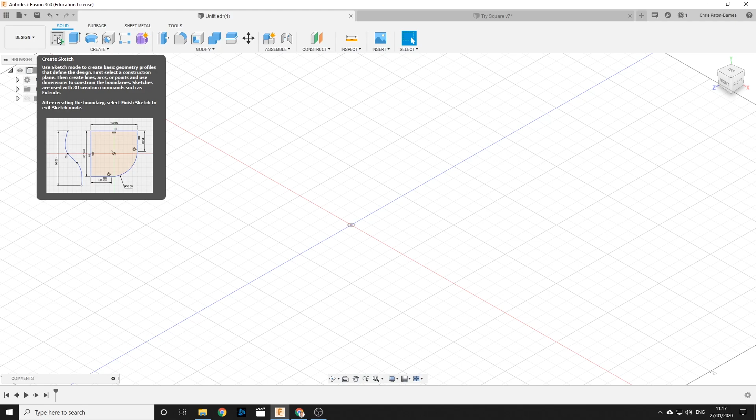So if I switch to a new document, I get my work area. Everything in Fusion 360, in solid modeling anyway, starts off with a sketch. So I can click this Create Sketch button, and it's going to ask me to select a plane. For this, we're going to choose the front plane. It's going to twist that front plane to make it face me.

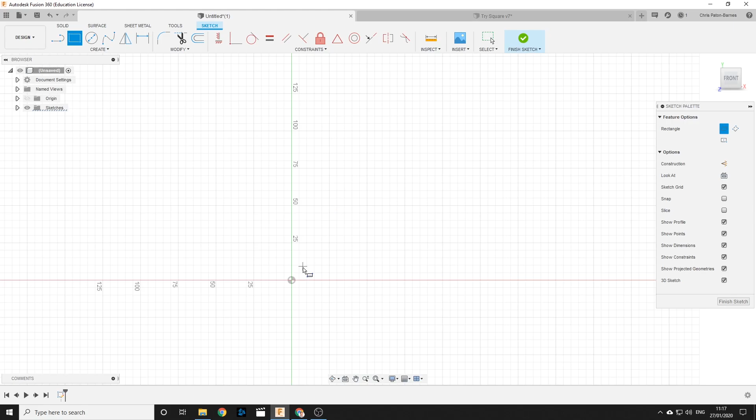We're going to start out by drawing a rectangle, a 2-point rectangle in this case. So we can start by hitting the shortcut for that, which is R. You see my cursor changes to a rectangle. Start that at the origin. Define the other corner by clicking again.

The first thing you draw in all of your kind of projects or designs should always start at the origin in some way. It should be tied to the origin, and that's generally best practice.

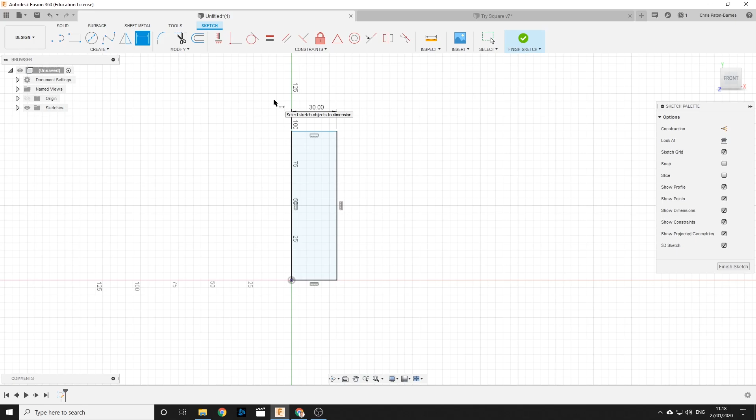We need to give this thing some sizes, so I'm going to hit D and see my cursor change to a dimension tool. I'm going to click on a line to define the length of it. Move my mouse, click again, and I'm going to type in 30. I'm going to do the same for the vertical line, one of the vertical lines, and I'm going to call this 125.

The default units that I'm using are millimeters. You don't need to type in your units if the measurement you want to define is already in your default unit, so I just need to type 125. I press enter, and then, if I'm happy with this, I can press finish sketch.

The finish sketch button only appears when you are currently editing a sketch. So if you're confused about why you can't edit something or can't change something, it's probably because you're not editing the sketch.

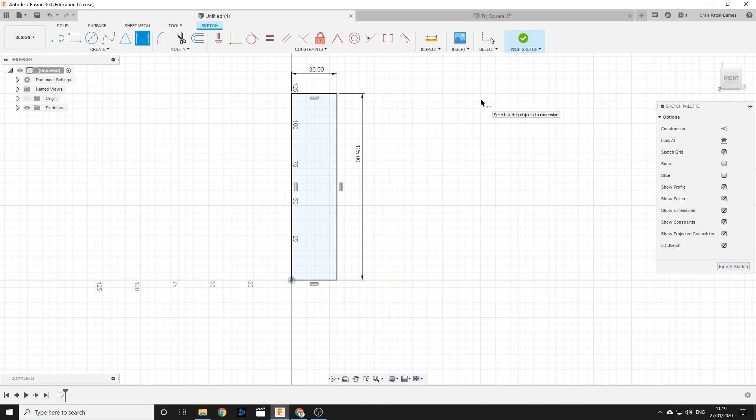Press finish sketch. Let's see if we can look at this in more of a 3D view. So we can come over to the view cube over here and press home. Now you can see we're kind of in a 3D view. If you're on a laptop, you can use the trackpad and pinch to zoom in and out. If you're on a mouse, you can just use the scroll wheel.

We need to make this 3D. The part we are currently making is the stock here, the handle. So I'll switch back. To make this 3D, the tool we use is called the extrude tool. Extrude, shortcut for which is E. It can also be found in the Create menu here. You also might have it in your shortcuts up here.

Most of the tools that you use, a dialog box will come up. This is like selecting the options, filling in the boxes when you're checking something out online. You have to go to fill in your billing address, your delivery address. Some of these things are optional, some of the things are essential.

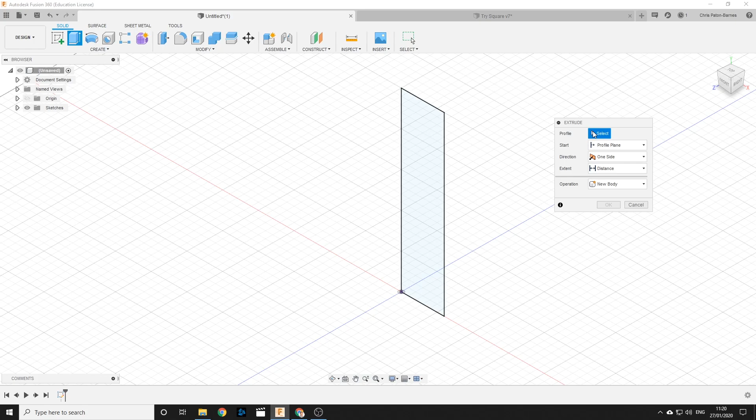A profile is what you want to be extruded, what you want to make 3D. So the blue outline indicates that we are currently on this option. So if I click on my profile, now it says 1 selected.

For the moment, for beginners, you don't need to worry about direction or extent. You just want to put in the distance. You can drag out the distance, but the problem with that is it will snap to your grid settings. So if you have grid snapping on, it will snap to your nearest grid setting. In this case, the amount we want to extrude by is 17 millimeters. So I'm going to type in 17, and then I'm going to press OK.

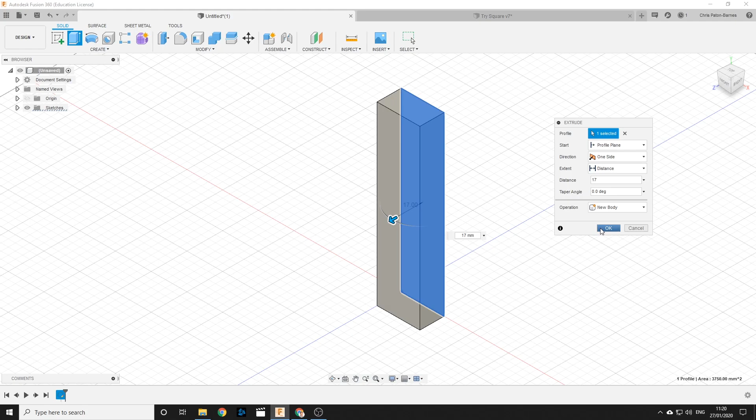Now, I was a little bit naughty because I gave you the wrong dimension for the original rectangle we drew. You can see that in our timeline, this area down here, your timeline contains icons referring to or corresponding to each step that you took in order.

So this is the icon for a sketch. You can see it corresponds, if I click on it, it highlights what that corresponds to. Okay, that little rectangle we drew. If I click on this rectangle, this extrude icon is here. You see it matches the same icon as the extrude. It highlights this body we've got.

If you want to change the size of this, you might be tempted to extrude again, extrude this way and make it a little bit bigger. You could do that, but it's incredibly bad practice. You should never do that. The reason is, if I click OK, I now have 3 steps in my timeline rather than 2.

So if I'm trying to find something in my timeline, and you keep on doing that, you'll have millions of things in your timeline rather than just a few. So rather than doing another mistake to correct an original mistake, I'm just going to delete that by clicking on it and pressing delete.

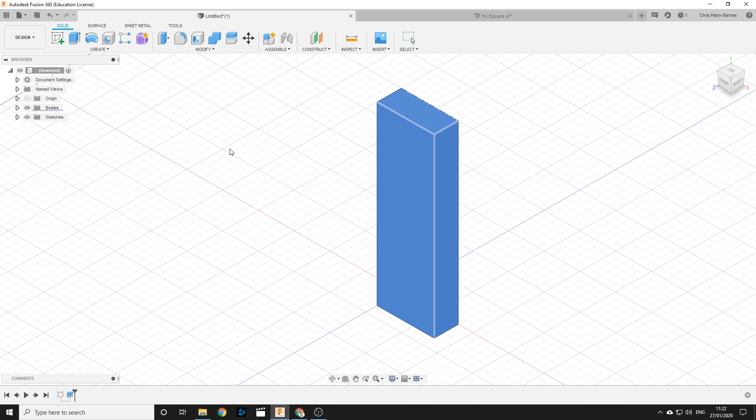And then it reverts back to how it was before. Rather than doing that, we're going to fix our original data.

I'm going to right click if you're on a mouse. If you're on a trackpad on Mac, you'd be option clicking or 2-fingered clicking to bring up the options menu. And then we're going to go up to where it says edit sketch. Click on edit sketch, and there it brings us back to where we entered our original dimensions.

These dimensions can be moved, they can also be changed. So for example, the one I gave you, which was 30, should actually be 38. If I double click this, I can now enter 38, the correct dimension. I'll press enter.

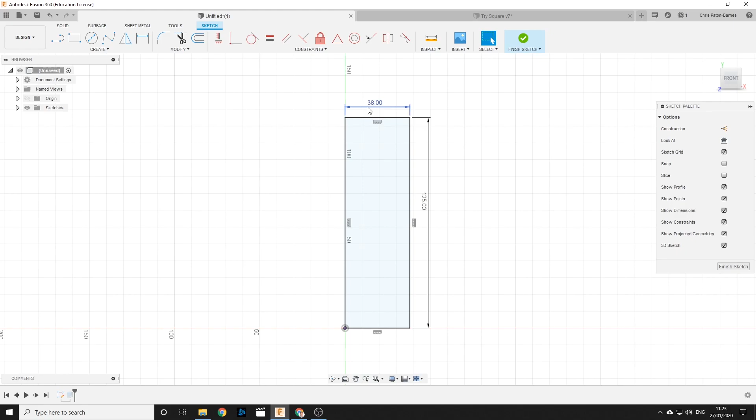The rectangle changes. When I press finish sketch, the shape will update. Do you notice my rectangle, my cuboid, is a different shape now?

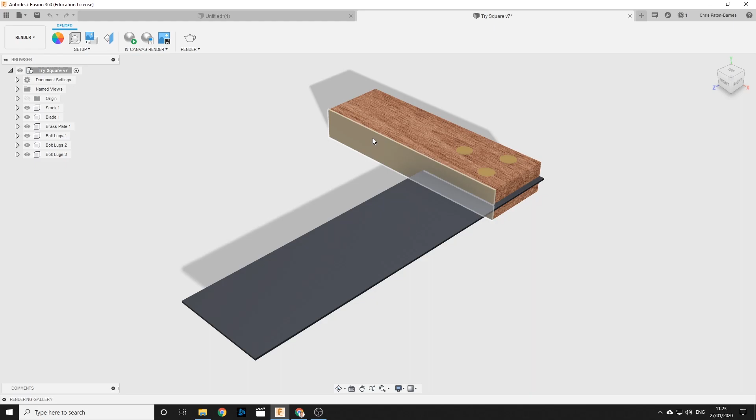The next part we're going to draw, if I switch back to our finished version, is this little brass plate on the front. So if I go back to our model, how do we do that?

Our brass plate is going to lie on this face here. And because that brass plate is exactly the same shape as the stock, our existing cuboid, we don't actually need to do a new sketch. We can use the existing face to extrude.

So all I need to do is press extrude, the shortcut for which is E. It's asking me for a profile. Now the profile I want to extrude is this shape here. I don't need to change anything here or here or here. The distance I want to extrude is 1 millimeter, so 1.

Here's where it gets a little bit different. I don't want to join. If I join those two bodies together, it'll just make one big blob. What I want is to show that there's a difference between those objects. So rather than join, I want to select new body.

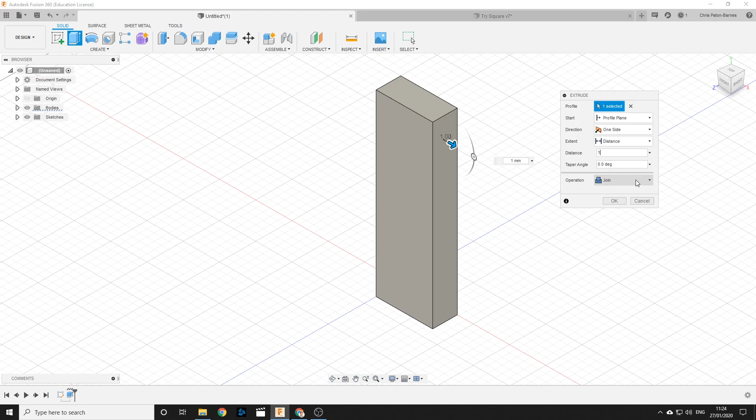If I zoom in, you'll be able to see the difference. Now there is a little separation between those bodies. If I click OK, you can see that there's 2 different cuboids there, which is great.

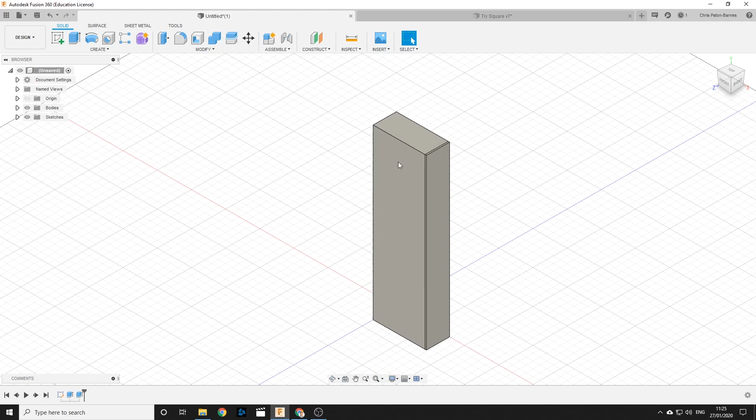So far you should have one sketch—please highlight that to show what it corresponds to—you should have an extrude, and you should have one more extrude, which is the tiny little brass plate on the front. Our next thing we're going to need to draw is the blade of the try square.

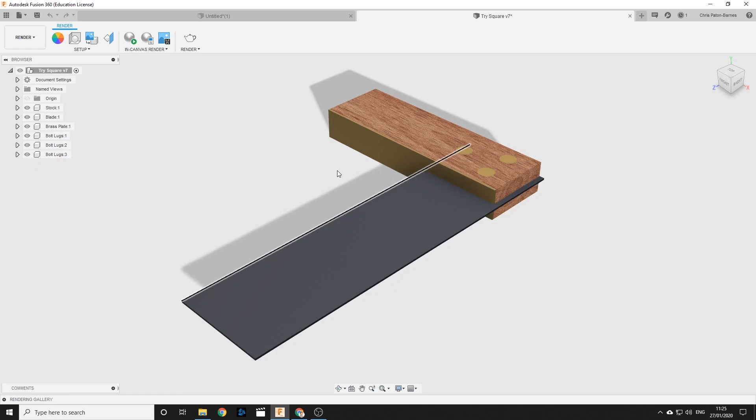You might be tempted to draw this big rectangle here and then extrude it downwards a little bit. But the problem, if you go back to our model, is that if I press create sketch, which face do I choose to draw this on?

If I draw it on this face, the blade will be on that face. If I choose this face, it will also be on that face, but actually it lies somewhere in the middle between those two. So we've got a bit of a problem.

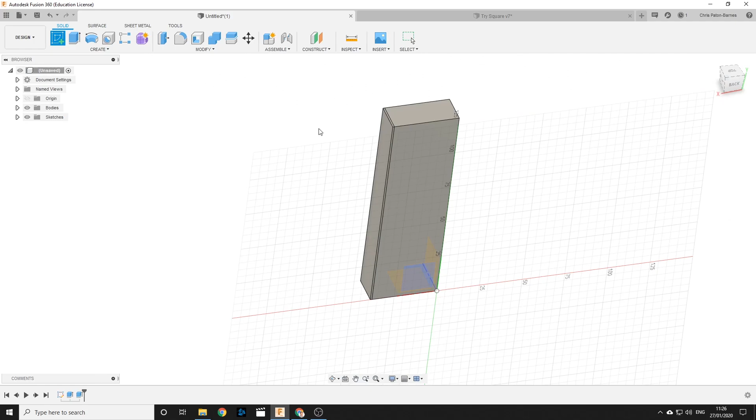In this case, instead of drawing the wide rectangle, we're actually going to draw on the back here—this tiny little rectangle—and extrude it this way, away from us.

So the way we're going to do that is we're going to switch back to our existing model. We're going to go create sketch. It's asking us to choose a face. Now, it's very important that you always choose the right face carefully to draw on.

Each sketch is tied to a 2D face, and if you choose the wrong face, you won't be able to draw the shape or in the orientation that you want to. The face that we're going to choose is the face around the back here.

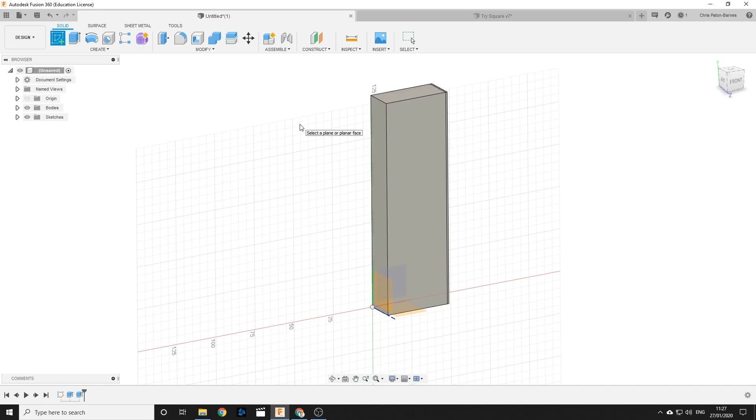So the way I'm orbiting like this is, if you're on a trackpad, you need to hold down Shift and just drag 2 fingers across the trackpad. If you're on a mouse and a keyboard, hold down the Shift key, hold down the middle mouse button, and then drag to rotate. The face we want to choose is this back face, so not the side with the brass plate, but the back face here. I select that, it's going to make it face us.

I'm going to zoom in a bit. And the first thing we're going to draw is a construction line. We want to draw a very small rectangle in the middle here, and to help us locate it in the middle of this shape, we're going to draw a construction line.

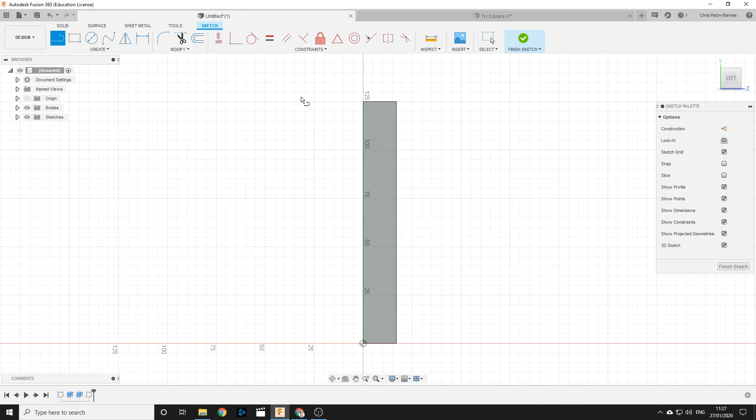A construction line starts with a regular line, the shortcut for which is L. If I hit L, you'll see my cursor changes to the preview of a line. You can also find the line tool in the sketch menu down here, or under the create menu.

And if I zoom in, the X that comes up is telling me that it's coincident with this edge here. But if I go to the middle, I'll see a triangle appear. Here we go. The triangle represents the midpoint of that line, and it will tie, if I click on the midpoint, it will tie that line, that start of that line, to the midpoint of the upper rectangle.

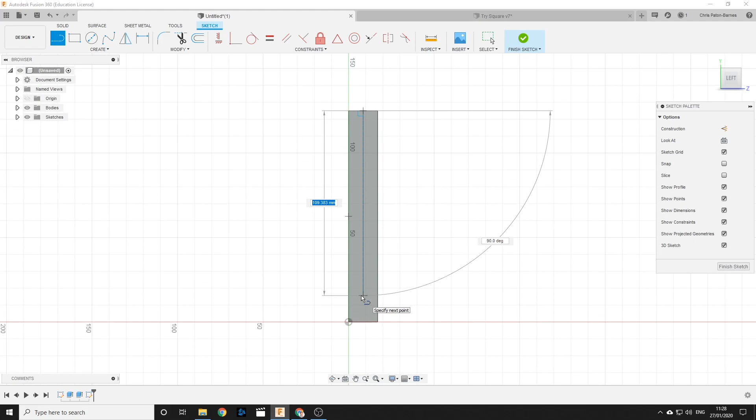If I zoom in at the bottom, we can do the same thing. I'm going to look for the midpoint. There's that triangle. I'm going to click to finish my line.

Now, to turn it into a construction line, we need to deactivate the line tool by hitting escape. We need to select the line we just drew, and then there's one of 2 ways of turning it into a construction line. Either we can come over to our sketch palette and click on construction, or we can use the shortcut, which is X, and you can see it's changed to a dotted line.

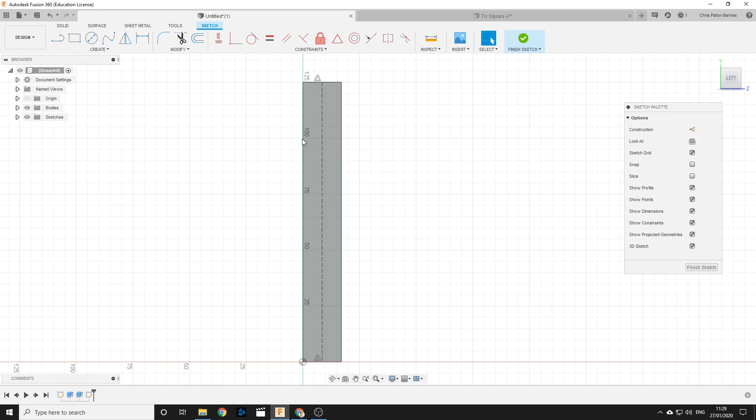If I zoom in, we can now start drawing the rectangle for the blade of our try square. I'm assuming you know by now what the shortcut is for the rectangle. It should be R.

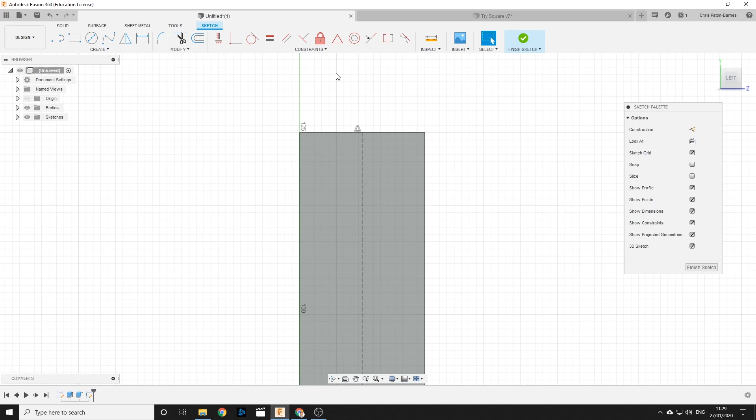And I want the first corner to be to the left of the construction line and inside our shape. And I want the second corner to be to the right hand side of the construction line and come above the shape. And I'm just going to make it slightly wonky just to demonstrate something in the next step.

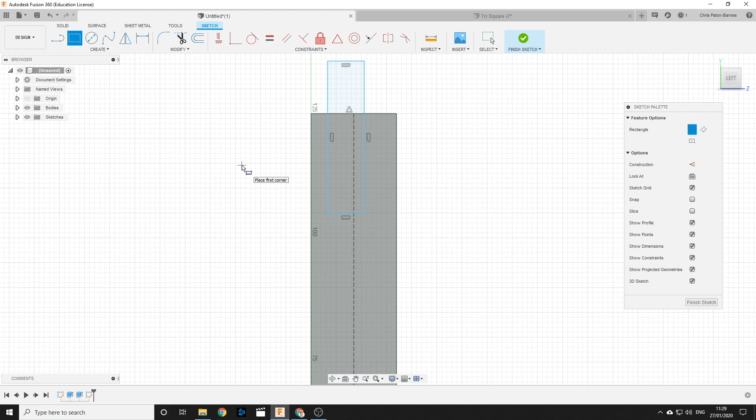So I'm going to deactivate our rectangle tool. And then if I zoom in, we can quite clearly see that it's uneven. There's less space here and more space here. And we always want it to be symmetrical about this construction line.

So what we can do is we can apply a constraint. The constraint we're going to apply is called symmetry.

And these ones here, these are your drawing tools here when you're in the sketch menu or sketch environment, and then these tools here in red are your sketch constraints. And constraints are like relationships between things. You can say this thing is going to be the same as this. This thing is going to be on the same level as this. This thing's going to be parallel to this.

The one we want to do is we want to apply symmetry. And the way the symmetry constraint works is you select the first object to be symmetrical, which is going to be this line. Then it says select the second thing to be symmetrical, which is going to be this line. And the final thing to be selected is it says select a symmetry line. We've already got our symmetry line, it's here.

Now watch what happens. Now our rectangle is symmetrical, and if we deactivate the symmetry constraint by hitting escape, and then we try and drag this rectangle, look what happens. They change together because they are symmetrical.

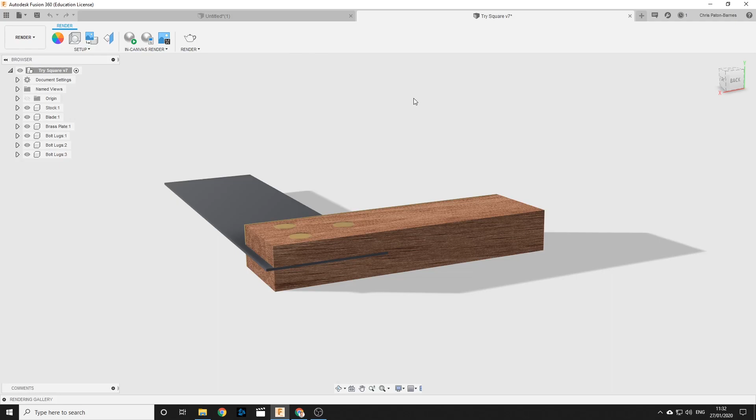Okay, and if we look at our try square, the blade sticks out a little bit, but not as much as we have it in our model.

So what I'm going to need to do now is dimension between two lines, between two sketch elements. I want to set the distance between this line and this line, and the way you do that is you click on them.

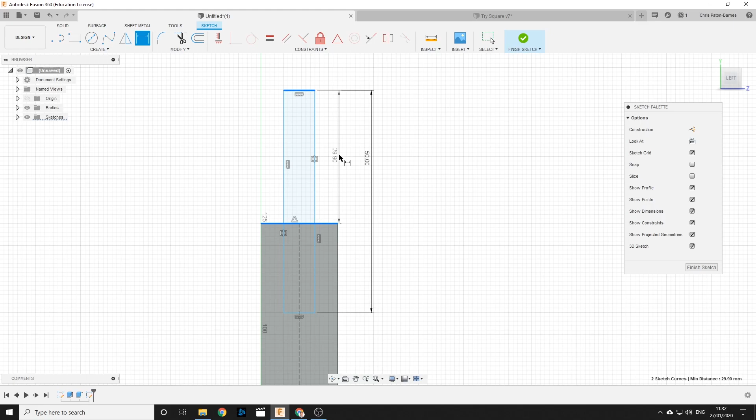I'm going to select this line here, I'm going to select this line here, and then I'm going to move between them, and it says 29.9, so drop the dimension, and this dimension is actually just going to be 3 millimeters, and now it's in the right place.

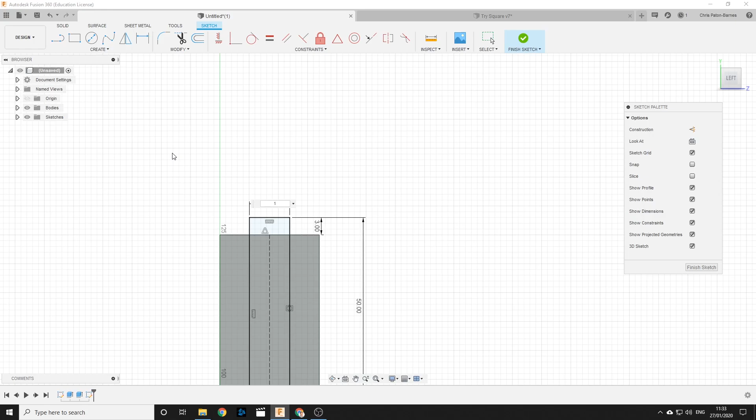The only thing we need to do now is give it a thickness, so it's going to be this line here, and drop this, and the thickness is going to be 1, just a measly 1 millimeter, and there we go.

Again, once you've got your dimensions, you can kind of move them around to a better place. So I'm going to move that one there. I'm going to move that one up a little bit. I'm going to move that one in a bit. Okay, so I'm going to press Finish Sketch.

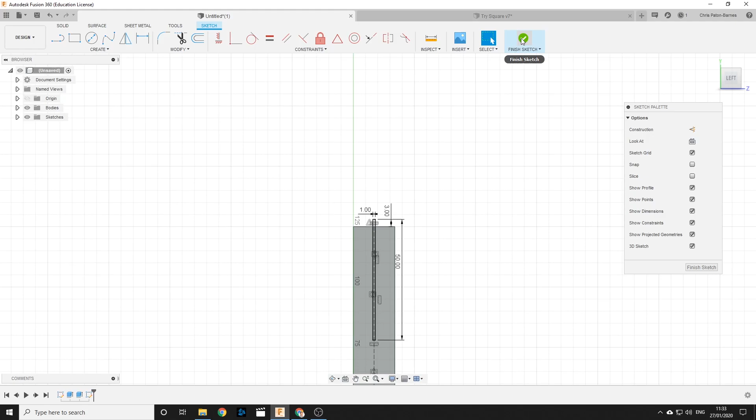And we're going to extrude these two areas. So E for extrude. We're going to rotate our view a little bit so we can see 3D. I'm going to zoom in.

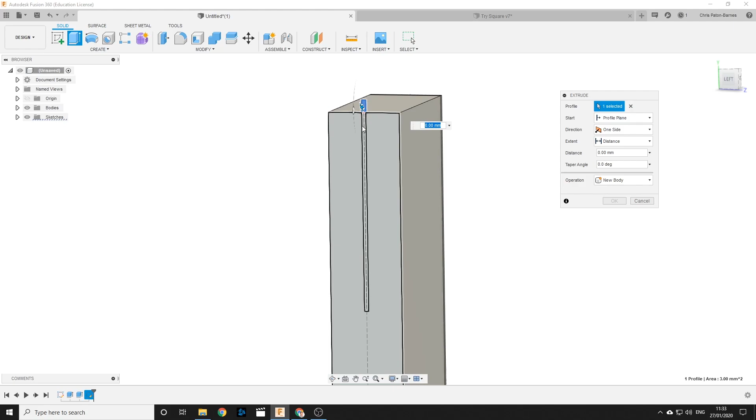And because this cuboid bisects the rectangle we just drew, it recognizes them as two different sketch entities. So we're going to want to select two areas here. When it says profile, I'm going to select this one, but I'm also going to select this one. So it should say 2 selected if you've done it correctly.

And if you look, if we go back to our try square model, it goes through our wooden stock and out the other side.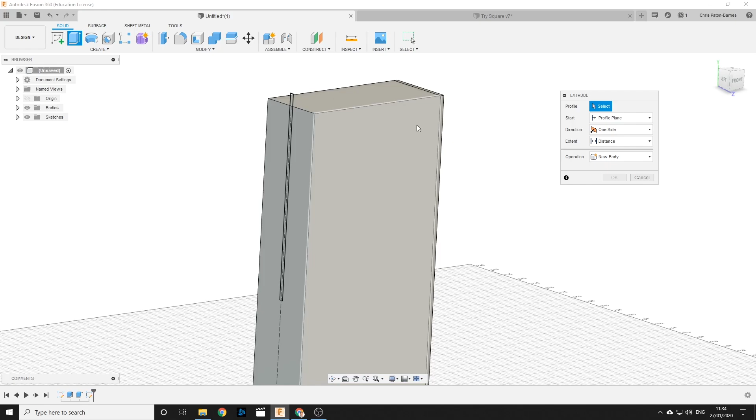So it's taken us out of extrude, so let's press E again. Let's do that step again. Zoom in, we're going to select this area, we're going to select this area,

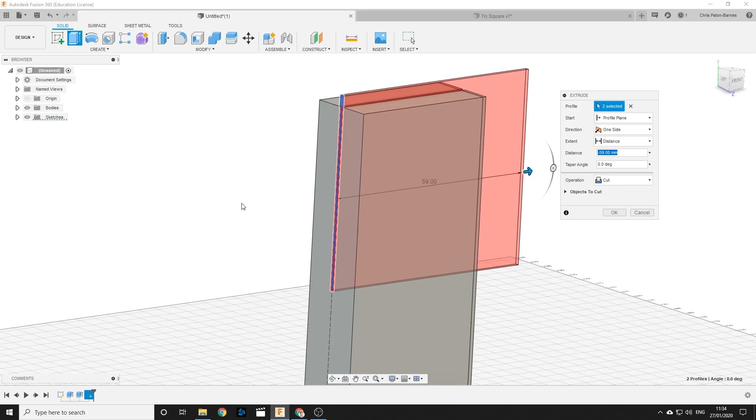and it's going in the wrong direction because we want to go towards the brass plate. So I'm going to drag this way. You can see it's giving me a negative dimension. So the number I type in is going to have to be minus 150.

And there we go. We don't want it. Can you see how down here under the operation it's telling us that it wants to cut? I could use that, but actually what we're going to do is select new body. Okay, like that.

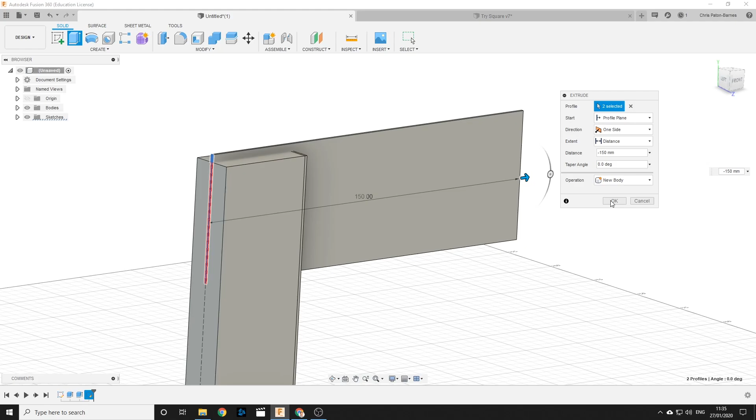And then when I'm happy with that, I am going to press OK. And there we go. That's us so far.

The problem that we've got now is that if you zoom in, can you see how something doesn't look quite right here? What should be happening is there should be a hole for the blade, and instead the blade is kind of occupying the same physical space as the stock.

And if we go to our browser up here, we've got a folder containing our sketches that we can expand, and there's 2 sketches, and we've also got a folder containing bodies, and there is 3 bodies.

If I highlight the one for the blade, this one here, this eye will toggle the visibility of this body on and off. So if I make it invisible, you can see there isn't actually a hole for the blade. But to make one, we can do a really simple operation, which is called modify combine.

So I say modify combine because it's in the modify menu. It's actually just called combine. So if we go to modify, and then we press combine, a little dialog box will appear.

Now, what we're going to be doing is using the shape of the blade to cut into the stock or the handle. So the target body is the one that's going to be getting cut. So the one that's going to be getting cut is the handle.

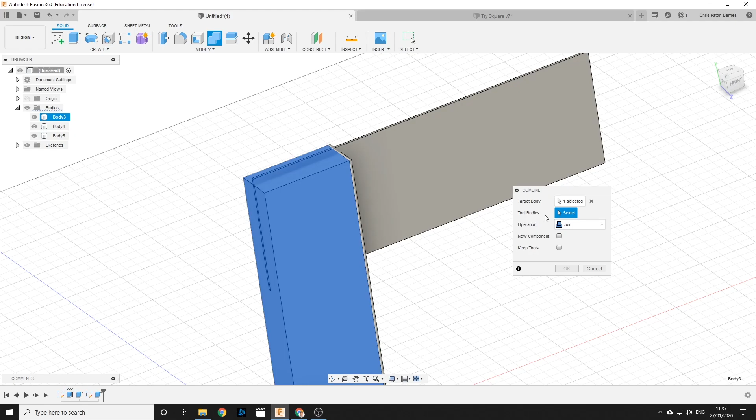Excuse me. The tool body is going to be the blade. We don't want to join them, that would be a mistake. What we want to do is cut. But the final thing you need to make sure is this will delete our blade, so we want to make sure we keep our tools checked. And then we press OK.

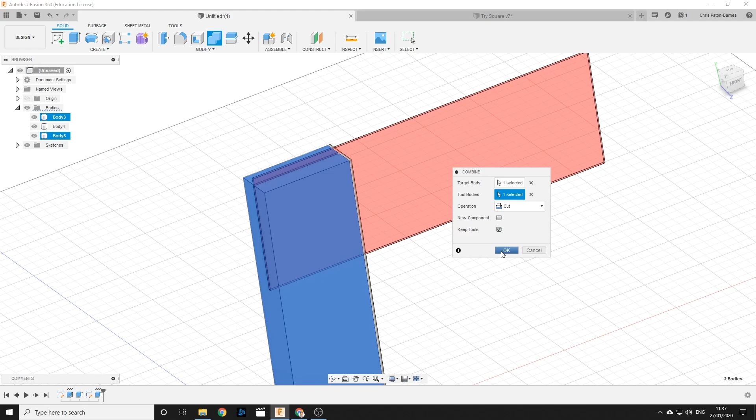It looks slightly different. If you zoom in, see those lines aren't interfering in this area. And if we select the blade and toggle the visibility off, there is now a hole for our blade to exist. But there isn't a hole in our brass plate, so notice there's no hole up here.

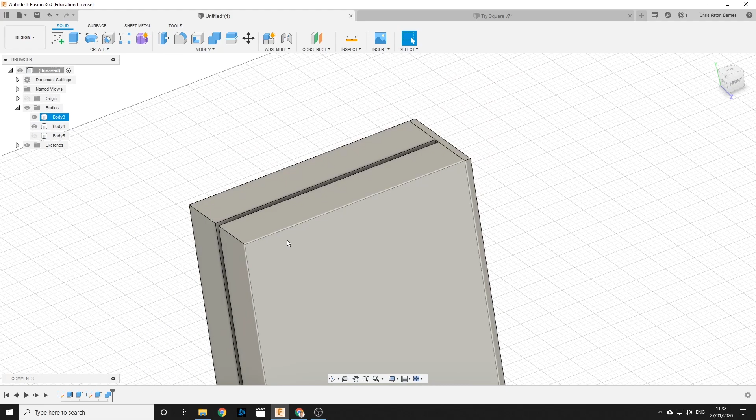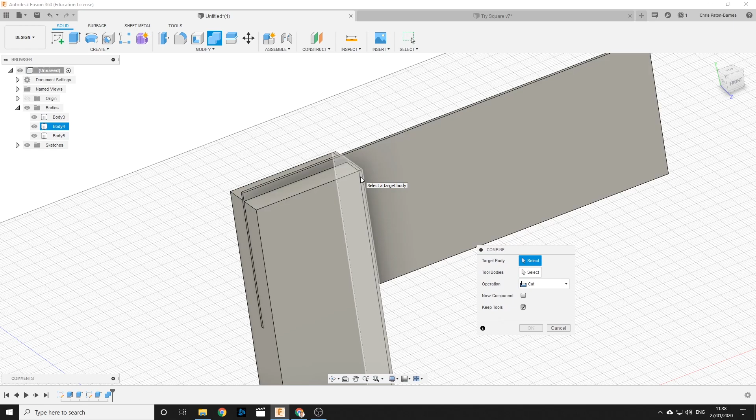So we'll turn the visibility of our blade back on, and we're going to do exactly the same step, except to the brass plate instead. So modify, combine. The target body is this brass plate here, the tool body is the blade. We want to cut, and keep the tools. And we press OK.

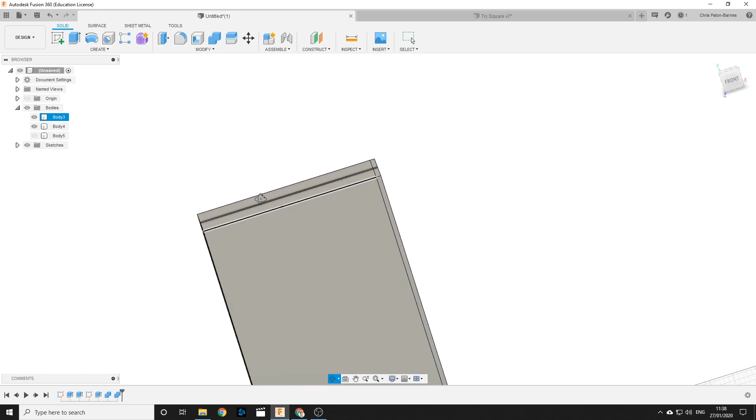And now if you notice, if I turn the blade off, there's a hole in both of them. If I orbit around, you can see there's a hole all the way through. And that's great, because if I change the dimensions of any of my bodies or sketches, the cut will update based on those new geometries.

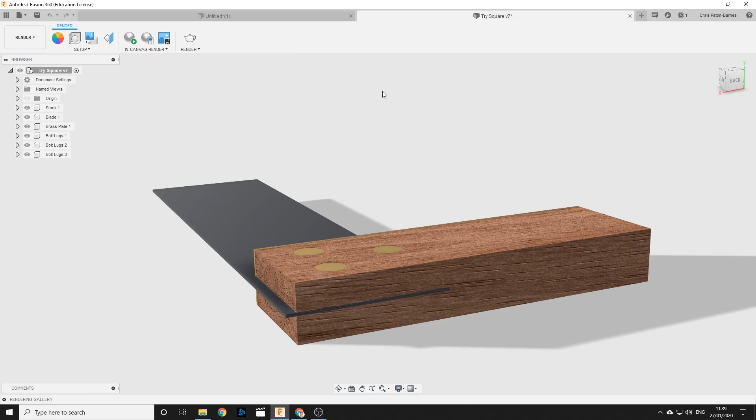So what's next is we need to create some of the information for the 3 bolts or pins that go through everything here. Fortunately, that should be quite easy, because we should have a nice surface here to do our sketch on.

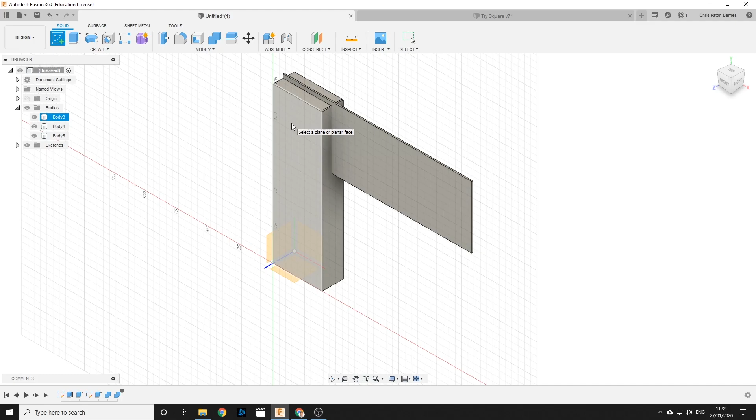So I'm going to press Create Sketch. It's asking me for a plane to draw my sketch on. I'm going to select this plane here, or this face here. It's going to make it face me.

And for the second time, we're going to draw another construction line. I'm going to press L to activate the line tool, zoom in, pick up on the midpoint there. I'm going to scroll down, pan down, pick up on the midpoint there with the triangle coming up. I'll deactivate the line tool by hitting Escape. Now I'm going to select the line we just drew, and select construction, or press X, to turn it into a construction line.

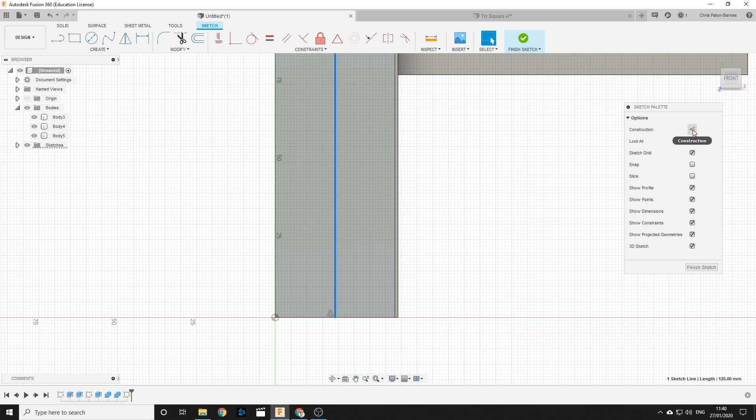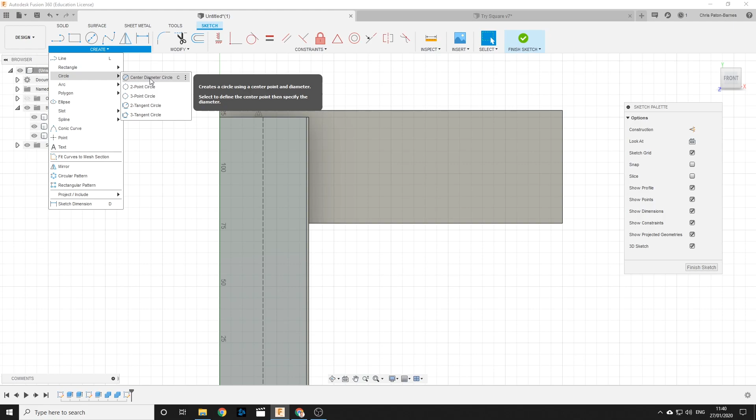Now I need 3 circles. To draw a circle, we're going to go to the sketch menu: create, circle, center diameter circle, shortcut C. And you always want to be using the shortcut rather than scrolling through the menus when you can, because it will save you a lot of time and make you a lot more efficient.

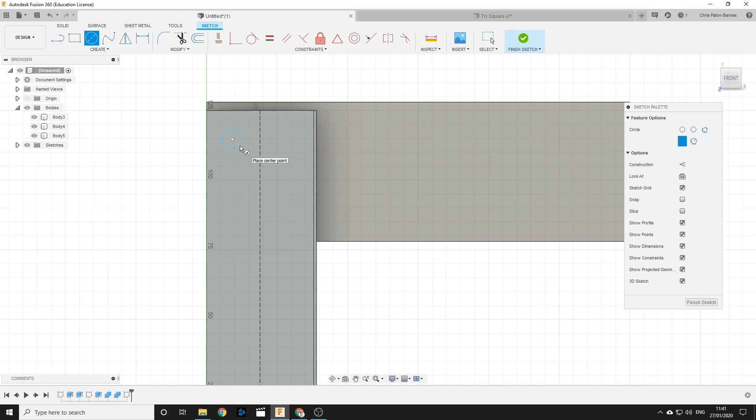So I'm going to need 3 circles. One of these circles is going to be on this line, 2 of them are not going to be on this line. So let's do the 2 that aren't on the line first. I'm going to click to define the center of the circle, move, click to define the edge, click to define the center, click to define the edge, and this one I want to make sure is actually on the center line, so click and then click.

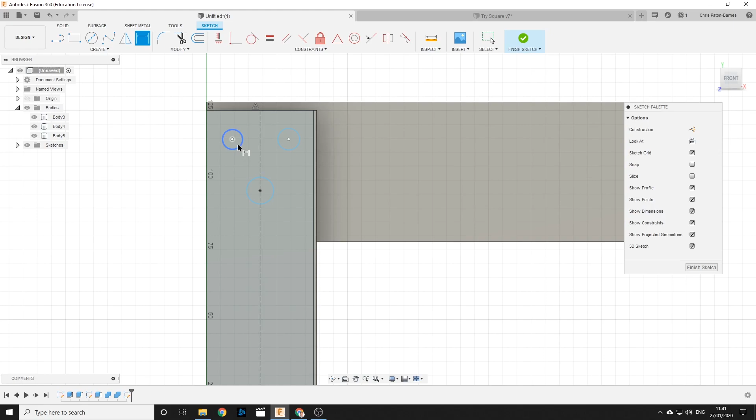You might be able to see that our circles aren't particularly equal in size, and I could activate the dimension tool with D and start dimensioning them. But rather than that, since I know they're going to be the same size and always stay the same size, we can just dimension one of them and give it some constraints. Actually, let's do the constraints first and then dimension them, because it'll be more fun that way.

I press Escape to deactivate the dimension tool if you had it activated already. And this time we're going to use the equals constraint.

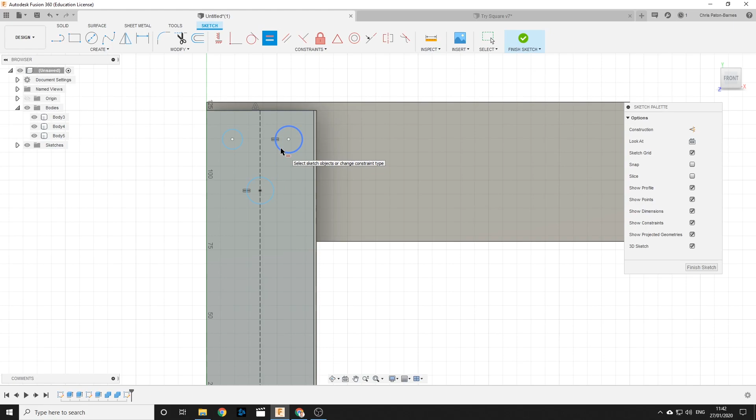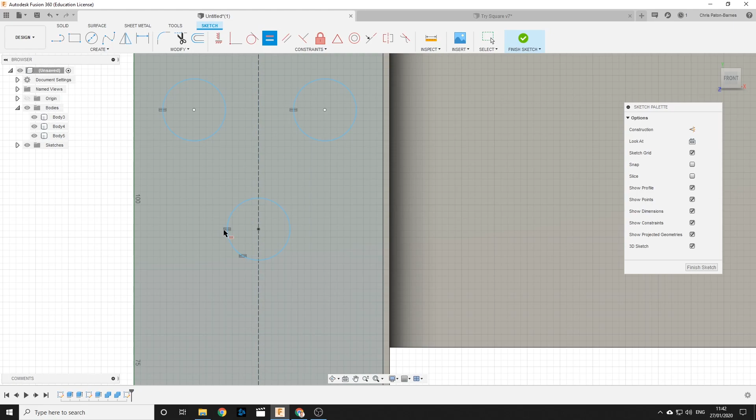Equals just sets two sketch objects to be equal in length or in diameter. For example, I can click on this circle first and then click on this circle, and you can see they now match. I can do it again with the original circle and this circle, and all our circles match. I can tell the equal constraint has been applied because the equal constraint logo has come up here—a little equals sign.

Now, if I press escape to deactivate the equals constraint, and I try and make this bigger or smaller, you can see they move together. They start changing size together. So I'm going to hit D for dimension.

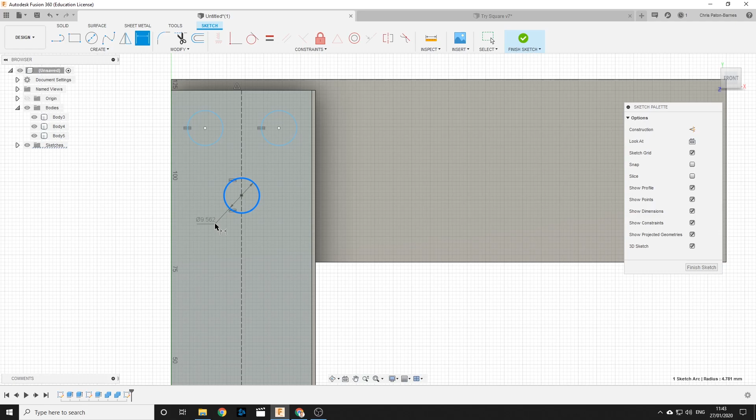I already had that one selected, so I'm just going to hit escape. That's okay, let's just use that then. Drop the dimension: we're going to set this to a dimension of 8. They will change with each other.

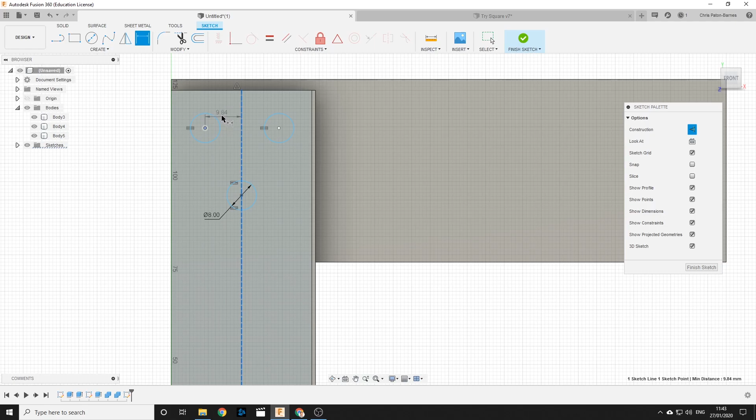I need to set the distance between here and here. So I'm going to say the distance between this line, we're going to click, and the distance between this line should also be 8. The distance between here and here should also be 8.

The distance between here and here, I'll do that again. There's a dimension in the way—why is that coming up? There we go. Let's zoom in so you can see that a bit better.

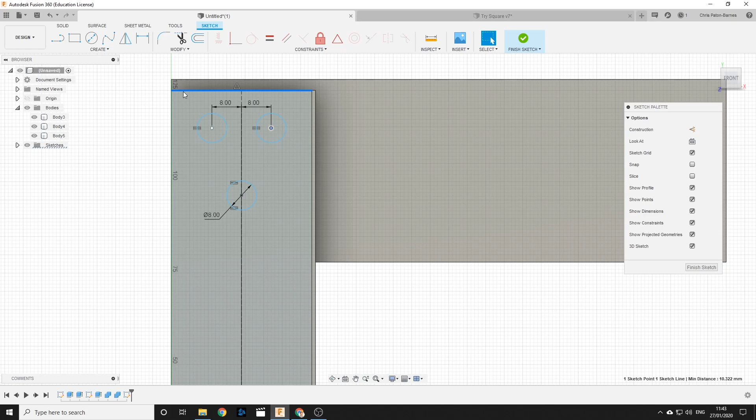D for dimension. Click on this, click on this, move in between, and let's set that to 8 as well. Or was it 8? I think it should be 12 actually. It should be 12, so set that to 12.

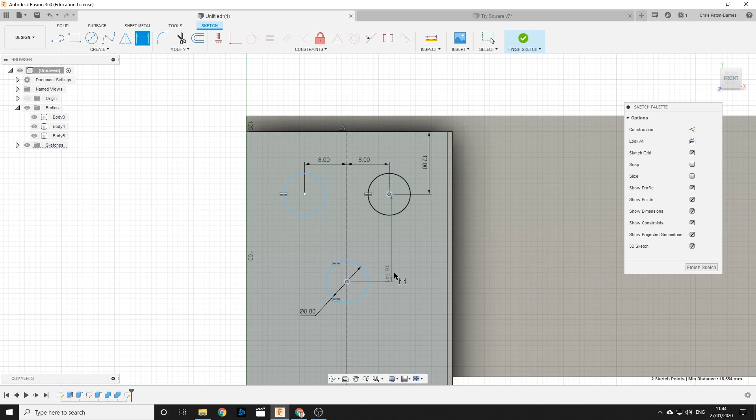And then the distance between here and here should be 22. We've got one more dimension to add. Let's find out what has gone wrong.

You can see when things are fully defined, they will turn black—sketch elements that are fully defined turn black. So if I try and click and drag this and try and move it, it won't move because it's fully defined. This one, however, is not black, so let's find out why it's not black.

If we try and drag it, we can see that it won't drag left and right, but it will drag up and down. So what isn't defined is we haven't got this 12 dimension for this circle. So I'm going to hit D. I'm going to select between this line, this center of the circle, and this circle. Let's try that again, it's gone wrong.

D. By the way, if anything's not responding the way we thought it would, or the way it did last time, all you need to do is press escape a couple of times to deactivate the tool you're currently in, and then reactivate the tool. So that's what I just did there.

So I'm going to click on this circle, click on this line, move the dimension in between, and let's set that to—this is something quite clever. If I want this dimension to always equal this dimension, rather than enter this again, I can just click on this dimension. Watch what happens: it says D28. So if I hit enter, it now applies the dimension of 12.

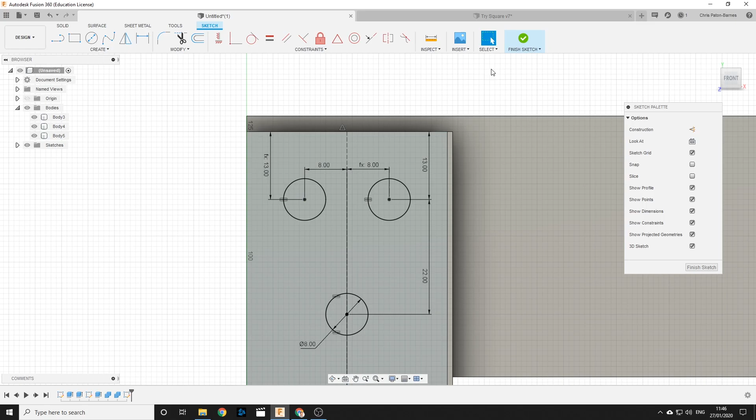When that's done, we're going to press Finish Sketch. Let's rotate our view a little bit to see that better, and we're going to need to extrude these. So the shortcut by now you should know is E. It's asking us for some profiles to extrude.

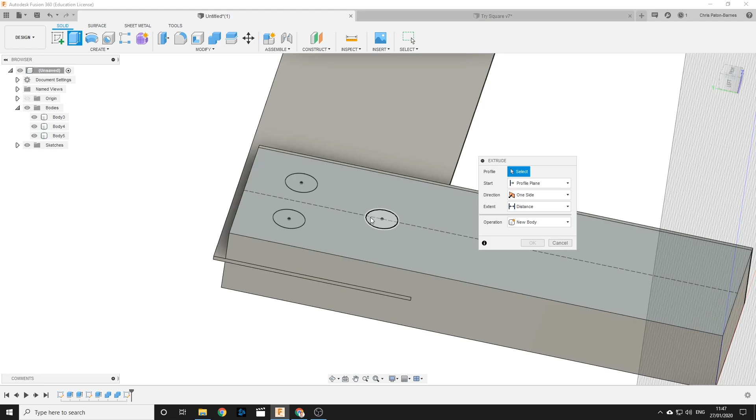These three things, they're always going to be the same—they're always going to be extruded together. So rather than doing 3 different extrudes, we're going to select 3 together: 1, 2, 3.

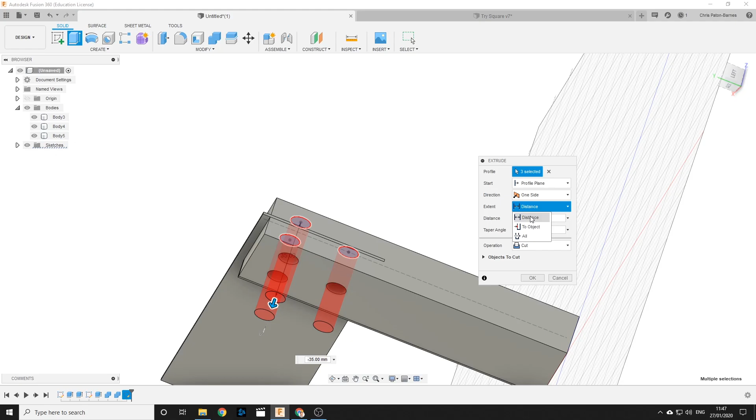We are going to extrude downwards like that. We don't want to cut, however. We want to do new body, but rather than entering a distance - like 17, which is the thickness of our handle - I'm going to show you something different. Under extent, rather than choosing distance, we can extrude it to an object. It asks you to select what object you would like to extrude to. If I select this face here, it's going to extrude to that face, so however wide or thick that stock is, it will always extrude that distance.

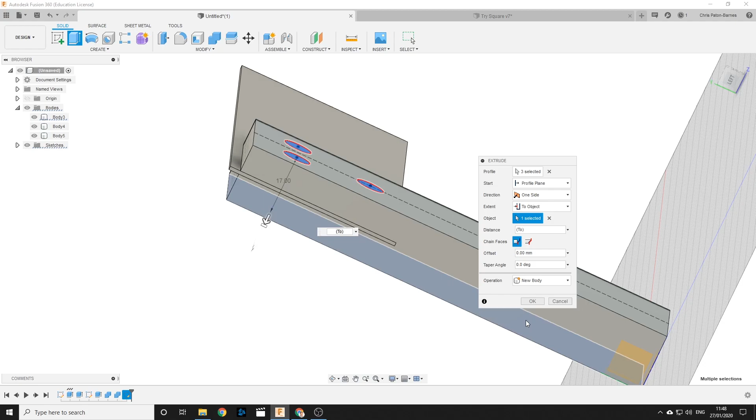The last thing to remember is we don't want to cut. You could use cut, but it would involve another step. I think it's easier in this case to use new body. And we're going to press OK.

Now some of you might think we've got the same problems as before - some faces or bodies intersecting with one another. Here are our 3 pins we just extruded in our bodies folder. Make sure you've got that visible - that one, and that one. If we turn these off, you can see there's actually no hole for them. So we need to do the same thing we did for the stock with the blade, for the pins as well - a modify and combine.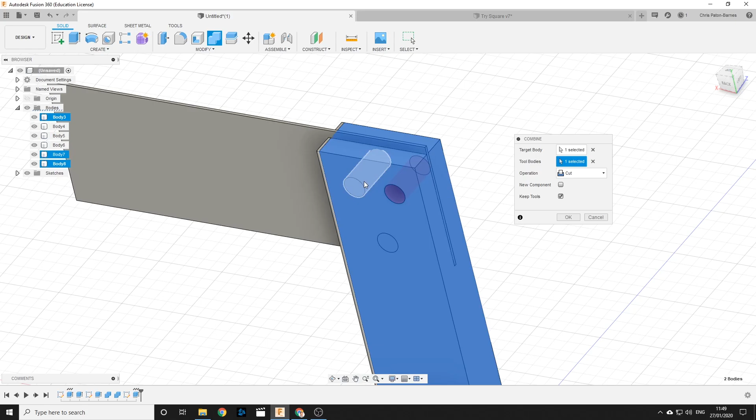It's very similar to the previous step. Modify, combine. Target body is the stock, the handle. Tool bodies - see how it says there's a plural option - we can select multiple tool bodies, so we select 1, 2, and 3, and we want to cut. It remembers what I did before - we want to cut and keep tools. I'll press OK, and now if you turn one of these off, there's actually a hole for it.

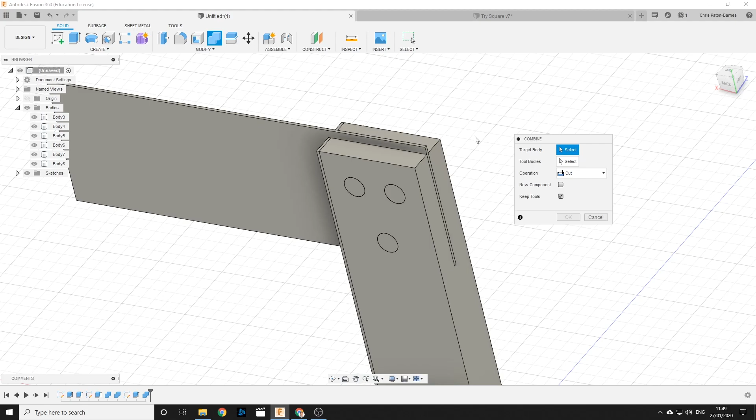There's one more thing we've got to do - the same thing but for the blade this time, because the pins go through the blade. So modify, combine, target body is the blade, tool bodies are the pins. Keep tools, press OK, and you are done.

There is your tri-square.

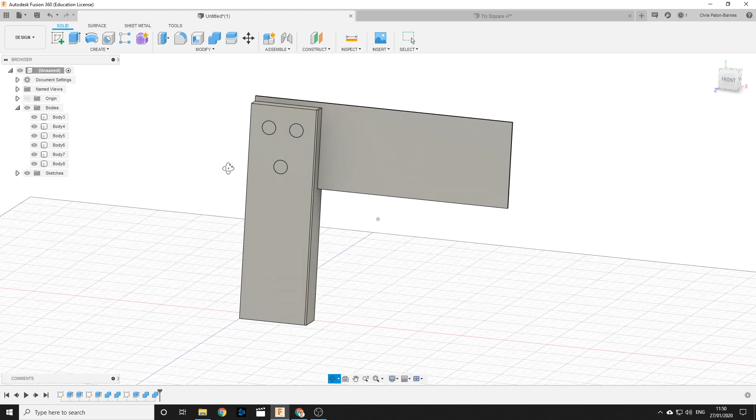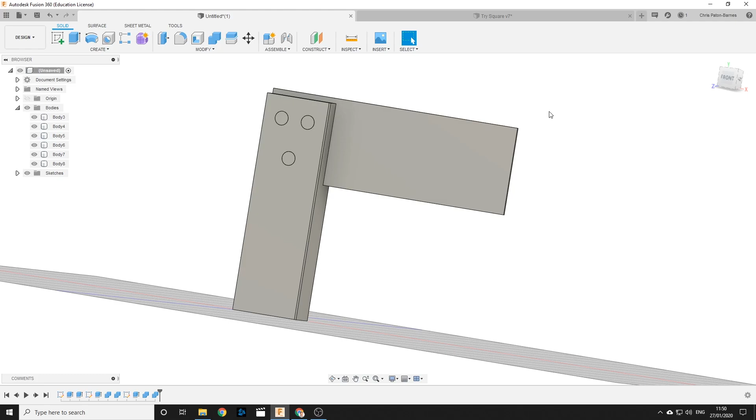It looks like our tri-square is a little bit off - it looks like the blade isn't long enough. I'm just going to check on my other model, checking the length of this line. It should be 190, so I've deceived you a little bit - the length of our blade should be 190, not 150 as it is, so we need to change that.

Those of you who were concentrating will remember that to create our blade, we created a sketch for this tiny rectangle up here, and then extruded it this way. So what we're looking to change is a feature rather than a sketch - we're looking for one of these in the timeline. Let's have a look.

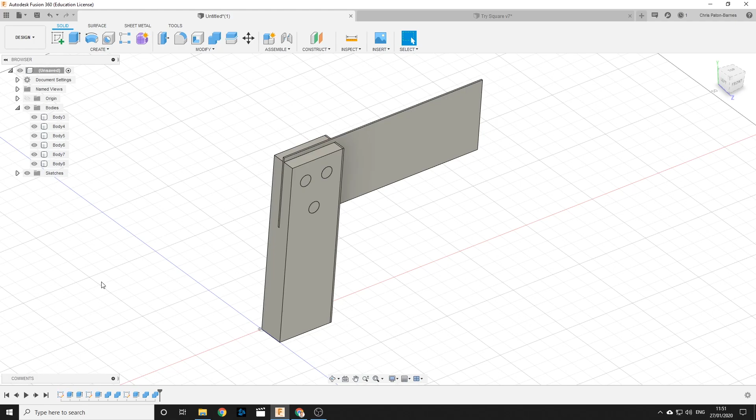Let's zoom in a little bit. We know it's not this one because it's a sketch. We know it's not this one because that's the extrude for our handle. If we highlight this one and click on it, it's not that either because that's the brass plate. There's the sketch we want, so we know it's going to be after this - this is the sketch where we did the center line and the rectangle, where we applied symmetry, and then the next step we did after this was extruding the blade.

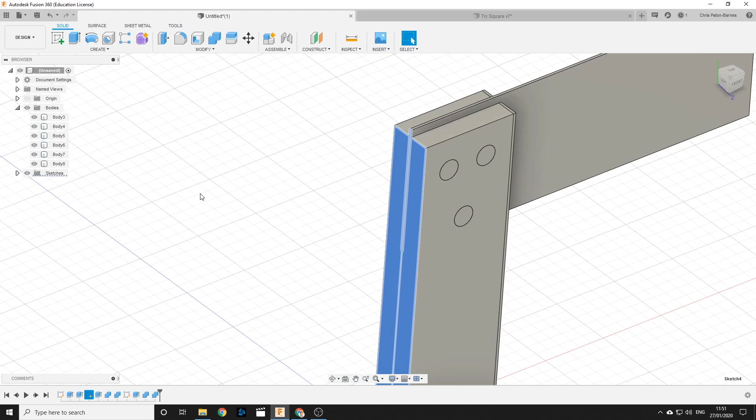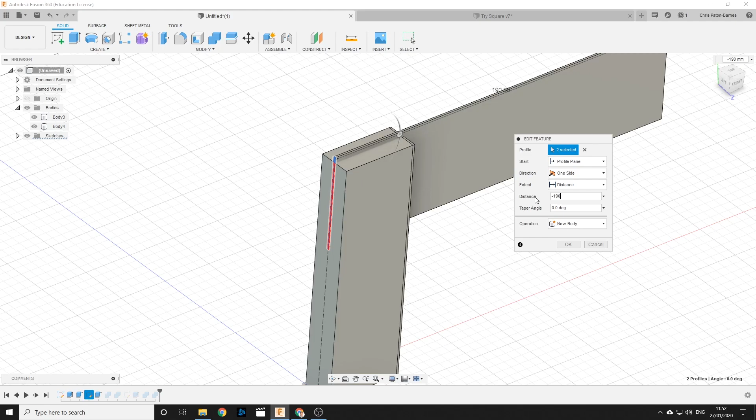So if we look at the next icon in our timeline, there's our extrude for our blade. All we need to do is option-click or right-click to bring up this menu, go to edit feature, and then rather than entering 150 or minus 150, we're going to enter minus 190. I'll hit OK, and now our tri-square looks more like a tri-square and a little less stubby. There we go.

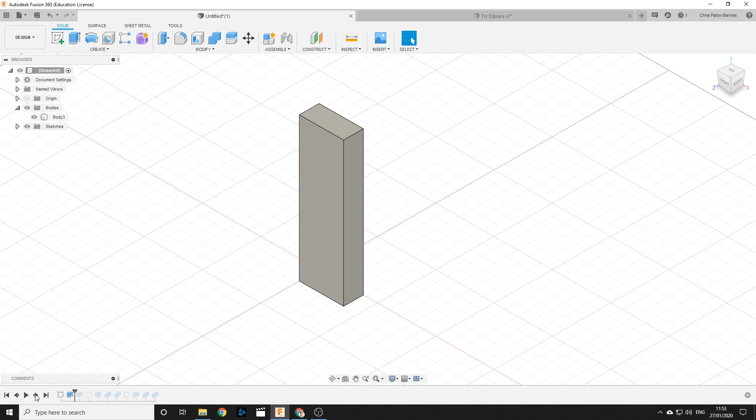So that's it. If you want to have a look at what you did, you can go back in time - hit this rewind button to go to the beginning. Don't worry, nothing has been deleted. You can press play to play through what you created, or you can step through individually - 1, 2, 3, 4, 5, 6, and so on. There we go. Well done.